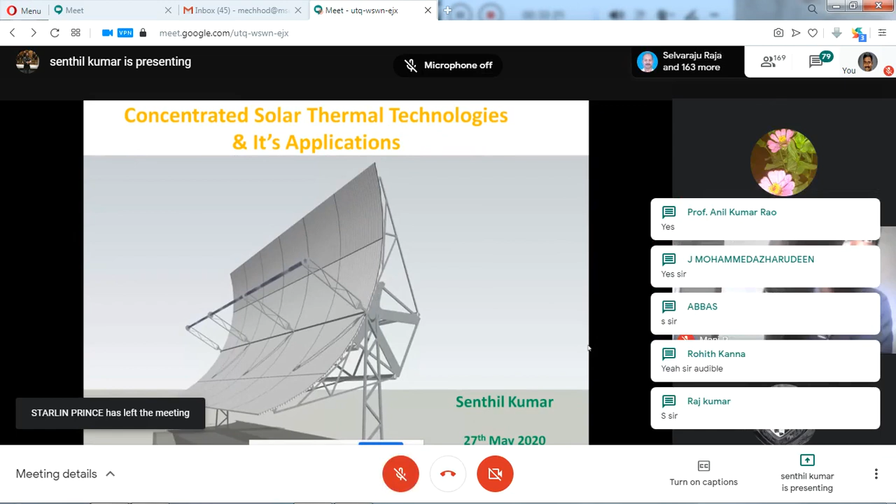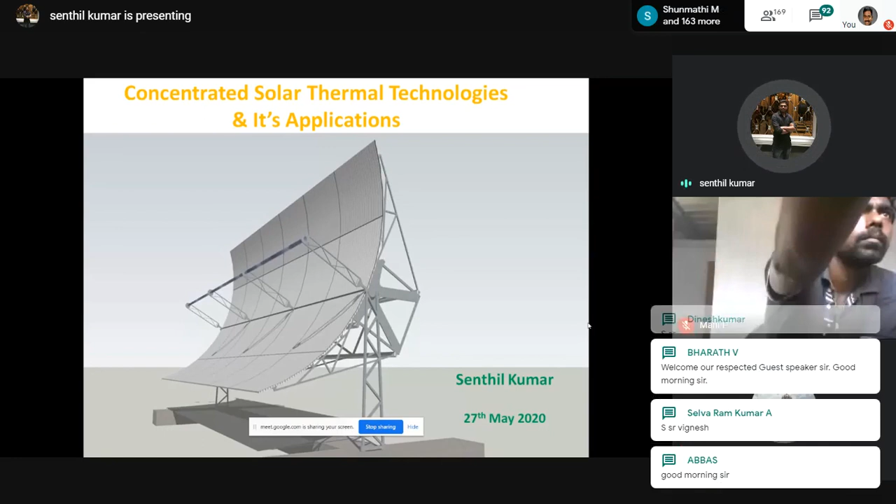So, very good morning, all. I'm Senthil Kumar. As Sir introduced, I am working in solar thermal field for the last 6 years, majorly into research and development and testing of solar thermal concentrators. Today I'm going to take a short class on concentrated solar thermal technologies and its applications. I have planned my presentation in this sequence.

First we will see what is solar thermal technology and why we need it. Then I will introduce you to the types of solar thermal technology, how it works, and what is the engineering behind it. Finally we will see the applications of solar thermal technology. Since it's a webinar, whatever doubts you have, please note them down, and at the end of the session we can discuss.

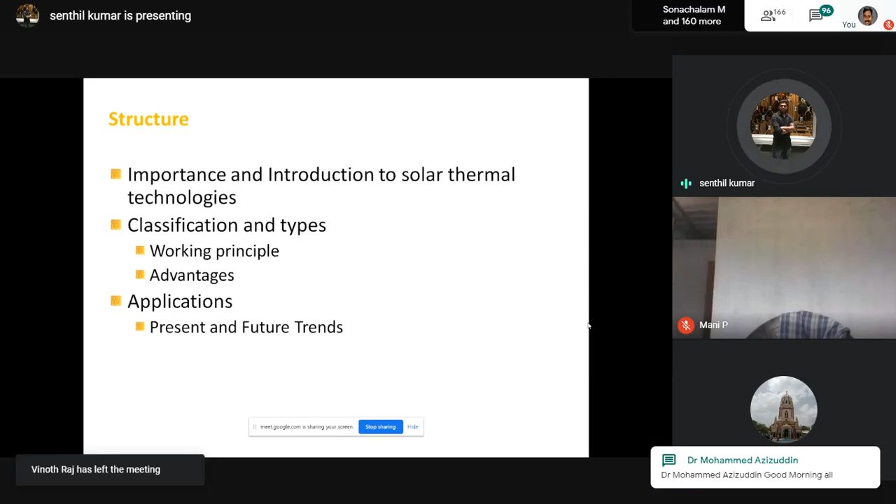This is very basic: we know that from the sun we receive two forms of energy, one is heat and another is light. Technically, we receive visible spectrum as well as infrared spectrum from the solar, and we call this solar power. So whenever we hear about solar power or a solar system, the first thing that comes to mind is solar photovoltaic technology. It's so familiar that everybody knows it, and basically that technology generates electricity from solar energy, which receives the light form.

So there is another set of technology, we call it solar thermal technology. This solar thermal technology harnesses the heat part, basically the infrared spectrum, and converts it into a useful form, that is hot water or hot fluid. We will be seeing in detail what are the available solar thermal technologies in upcoming slides.

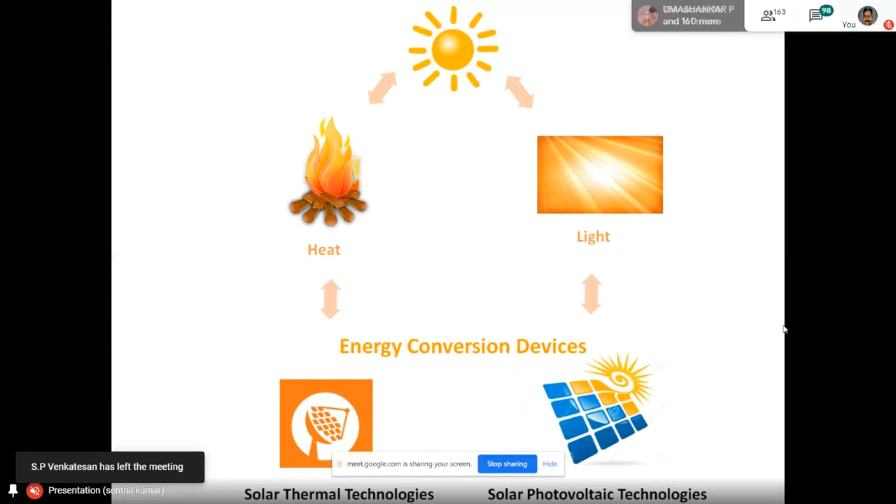But before proceeding further, why do we have to study this technology? Why is solar thermal technology available in the first place? Let's try to understand. There are two main reasons solar thermal technology has been created. The first thing is heat - there are different forms of energy we are using right now: heat, mechanical, electrical, and many others. But the fact is that the heat form of energy is majorly being used by us. In your household, we are not using much amount of heat compared to electricity - we pay electricity bills more than what we pay for heat.

But the fact is, even in our household, around 60 to 70% of our energy consumption is in the form of heat. You can analyze that - take the example of cooking, we need heat energy. Again, for air conditioning, either hot or cold, again it's a heat form of energy. Then for hot water, again we need heat form of energy. So in this way, around 60 to 70% of our final need is basically thermal comfort, not electricity. Electricity we are generating because of its high grade quality, and we can easily transfer it to some places without much losses.

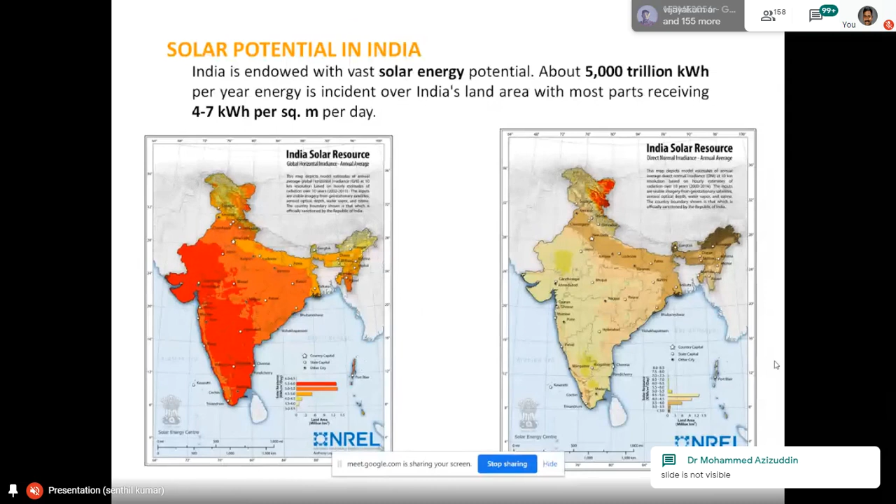Now, the classification of solar thermal technology. Solar thermal technologies are classified majorly into two types: the first is non-concentrating solar thermal technology, and the second is concentrating solar thermal technology.

Non-concentrating technology is also called solar water heaters. Most of us might have seen or used solar water heater systems, which come under the category of non-concentrating solar thermal technology. The basic working principle of this technology is the greenhouse effect. Hope you know how the greenhouse effect works, but let me give a very basic example.

Most of us might have experienced that when we park our car in sunlight, after some time the cabin temperature increases. The reason is the greenhouse effect created by our car windshield. The windshield allows short wavelength radiation from the sun to enter the cabin, but won't allow it back out, so due to that, the temperature inside the cabin increases with time.

The same concept has been adapted to generate more heat energy, which we call non-concentrating technology. We will see in detail how the system is actually built.

The second is concentrated solar technology. As the name suggests, in concentrating technology we concentrate a huge amount of solar radiation into a small point where the temperature goes very high. The very basic example is the lens and paper we played with in our childhood. All solar CST technologies have this principle of lens and paper, but with different geometries. People use different profiles and geometries to achieve this concentration, and we will see the technology in detail.

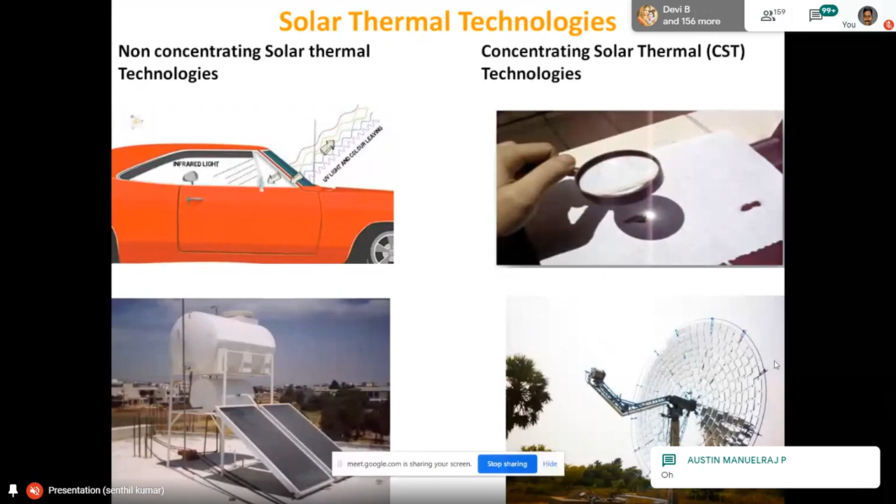There are 5 concentrating technologies available and 2 non-concentrating technologies available. The first is non-concentrating technologies, and there are 2 major types: one is the flat plate collector, and another is the evacuated tube collector.

Both of these are also commonly known as water heaters. Let me tell you how the solar water heater works, taking the example of the flat plate collector. Here we use a copper plate with a black coating, and above the copper plate we cover it with normal glass. When you expose this black copper plate to the sun, the temperature of this black body increases because of solar energy, and the glass further creates a greenhouse effect. Due to that, the temperature inside the chamber rises as high as 100 degrees Celsius.

So when you flow water or air above this copper plate, the water or air gets heated up, and that is collected in a separate storage tank. This is how the basic flat plate collector works.

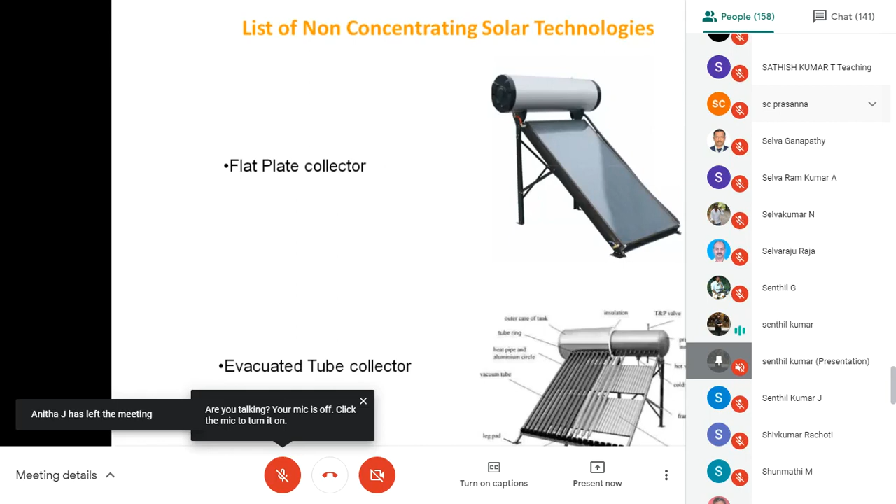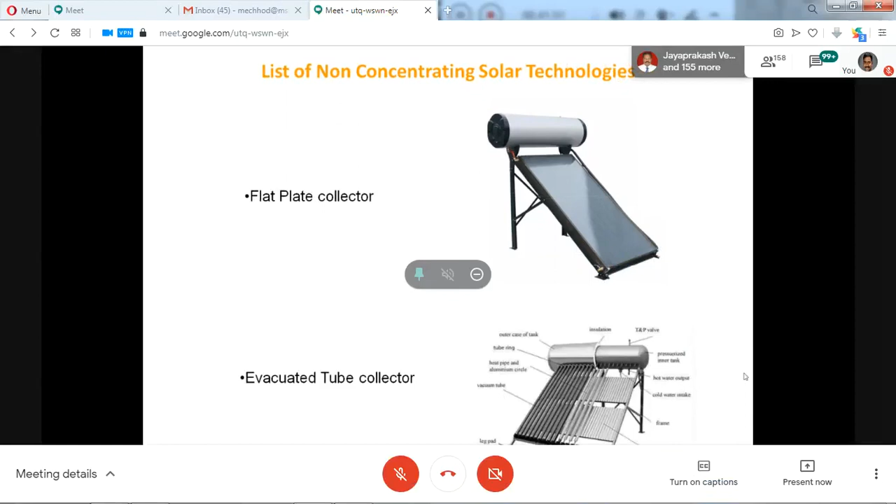In the same way, another technology is called the evacuated tube collector. Here, instead of using a flat surface, we use small individual tubes made up of glass, which are evacuated - completely vacuum - so that the losses are reduced. Both these non-concentrating technologies are able to deliver a temperature range of 60 to 120 degrees Celsius.

So you can ask where these are being used. These water heaters are generally used in households as well as in industries. In our homes, we can use this solar water heater in place of electrical geysers. Electrical geysers are one of the energy-consuming devices in our home, and they can easily be replaced with this solar water heater.

The advantage of solar is it's very cheap. You can see the cheaper cost, and the lifetime of these heaters is around 20 years. So for 20 years, any electrical heater requirement can be completely met with the help of this technology.

Okay, 120 degrees is fine for the domestic range. When we talk about industries, industry needs higher temperature. In some industries, they need 400 to 900 degrees Celsius, and in some cases, they need 1000 plus degrees in the metal industry.

So for meeting this requirement, we use concentrating solar technology. In my presentation, I will be using the abbreviation CST for concentrated solar thermal technology. In concentrating solar energy, you concentrate huge radiation into a focus. There are 5 different technologies presently available under this category, and I will tell you why each technology was developed.

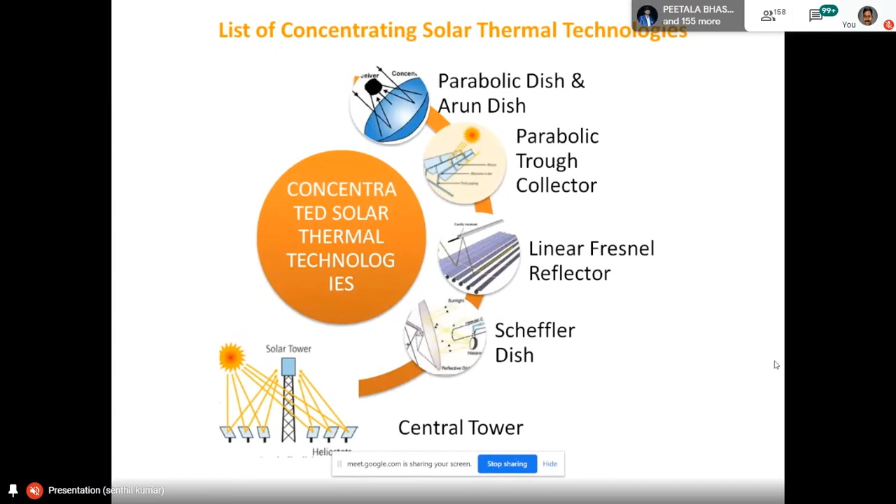So let's start. The first kind is a paraboloid disc concentrator, which is a three-dimensional parabola. We know that a parabola has a focus. So mathematically we draw a parabola and we know the focus. What we do is make a parabolic shape using a mirror.

In the picture you can see the entire parabolic mirror, and when you track this mirror normally, what happens is when sun radiation falls on the parabola, it reflects to the focus. This image will help you understand: whatever falls on the surface of the mirror is diverted to the receiver, and in the receiver part the temperature is high.

So this high temperature at the receiver can be used to supply either water or oil. The oil gets heated up, and that hot oil is used for industrial applications. This technology is able to deliver 850 Celsius, which is a very high temperature that meets many requirements. This is one of the solar thermal technologies.

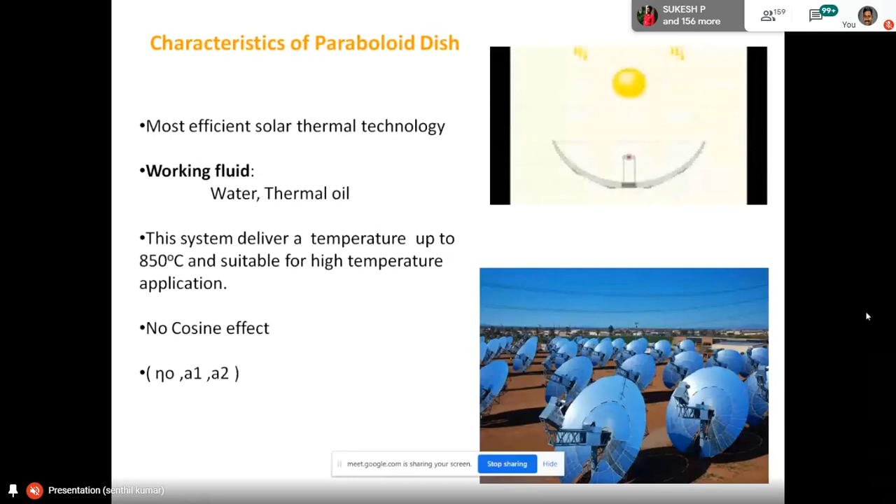So people started developing another technology to solve the land issue. The second technology they developed is called the parabolic trough collector. This is a modified version of the paraboloid disc. In the paraboloid disc, we used a three-dimensional parabola, just like a dish. Now here they use the shape of a trough, completely made in the shape of a parabola. The concentrator is made of solar reflectors, the receiver is made of a solar absorber, and the concentrator is placed in the north-south direction.

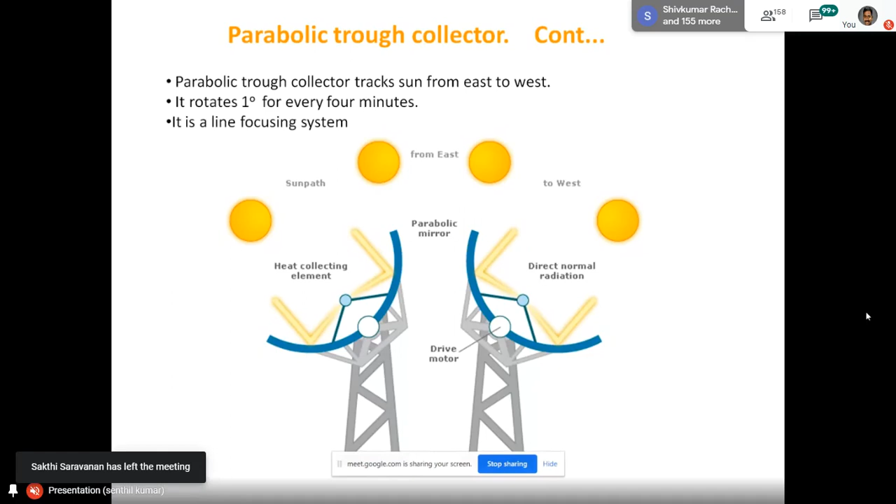It works like this: this image will help you understand how it works. In the morning, the concentrator faces east, and it tracks slowly according to the sun's angle, so by evening it faces the opposite side. This is how the solar concentrator works.

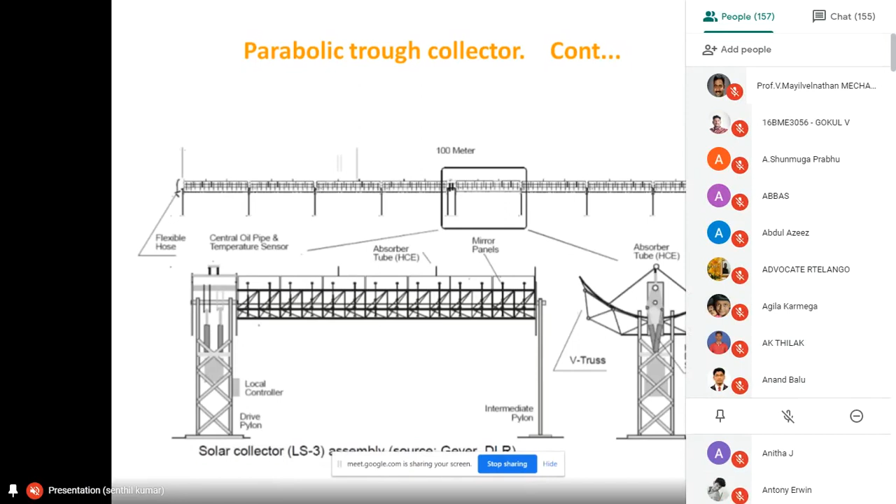This is the advanced concentrator over the parabola. Here you can install n number of modules in series together with one another. These technologies are able to give us 400 degrees Celsius.

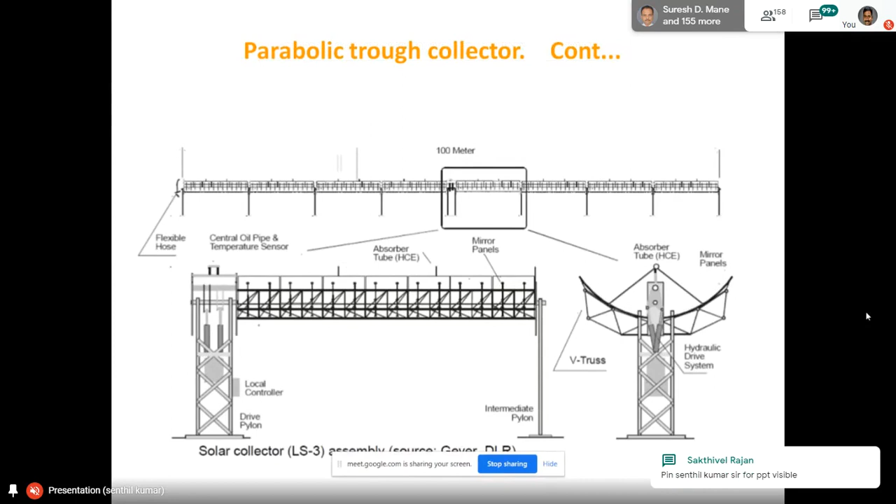So you can see here, there are different parabolic concentrators that come with modules, and you can connect n number of modules in a series. I will show you one such system in our institute. Here, compared to the earlier setup, you can see we use much less land than the paraboloid disk, which is the advantage of the parabolic trough collector over the first technology.

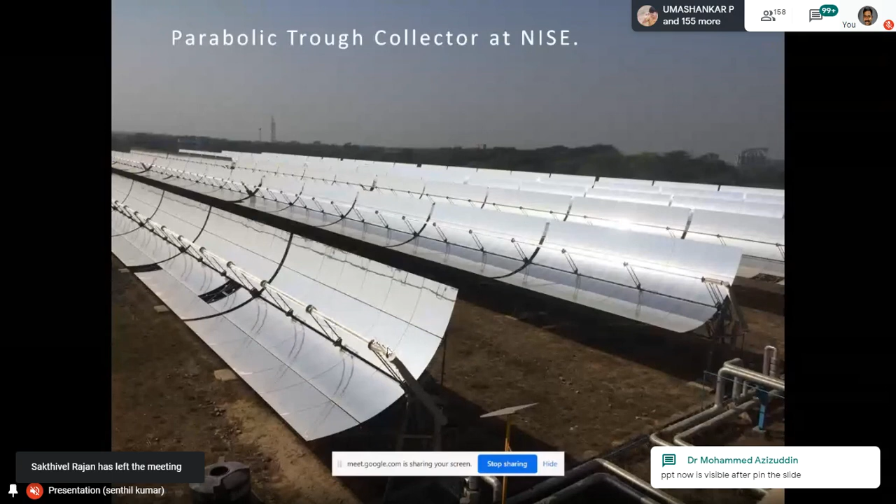You can see the first trough there, right? The shiny part is where sunlight falls on these mirrors, which track and reflect to the black part you see in the middle, the receiver tube. Inside this receiver tube, fluid flows from one end of the collector to the other, and during this flow the temperature of the fluid rises gradually, going as high as 400 degrees. People use this hot water or hot oil for different purposes, like for industrial processes or power generation.

We will see all of these. So the third technology is a linear Fresnel reflector.

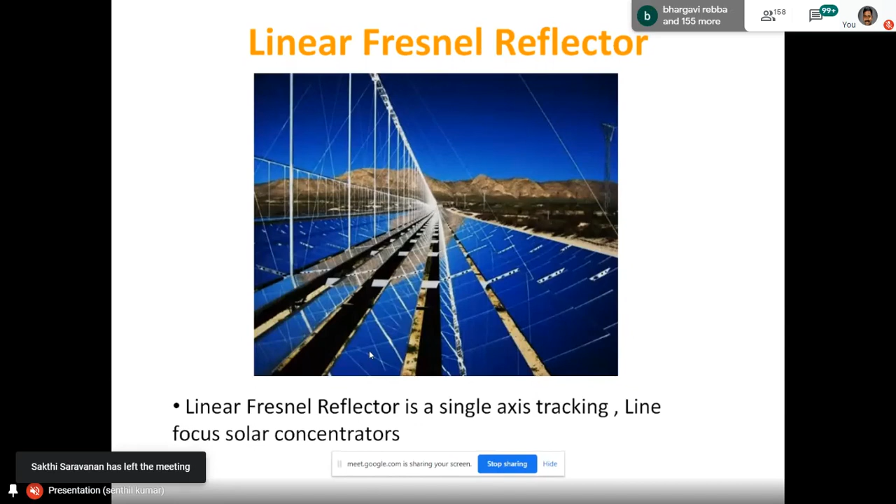Parabolic trough concentrator had its purpose, but there were still improvements to be made. Let me tell you the drawbacks of the parabolic trough concentrator. This parabolic trough has a curved mirror, and they are quite big in size, and the manufacturing of a curved mirror is very costly.

So there is a restriction to constructing a big solar concentrator. So what people have done is adopt the concept of Fresnel, a French scientist.

Hello. Is it audible? Just yeah. Yes, is it okay now? Okay, okay, just give me a moment. Is it? Yeah, yes. Sorry.

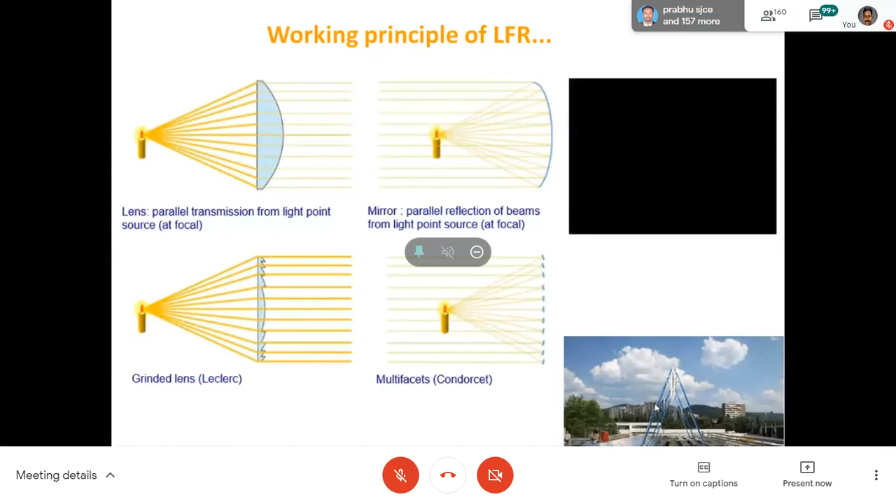So this LFR started adapting the concept of Fresnel, a French scientist. We know concave and convex lenses, right? Convex lenses basically have a curved profile, and manufacturing that curved profile is very costly compared to manufacturing a normal glass or mirror.

What Fresnel did was make small cuts at different angles. In the second image you can see the first image is actually a mirror, and the second image is basically a cut section of a concave mirror, where he changed the angles of these cut pieces. Now both do the same thing, but here we don't have to generate a huge curved profile which is costly. This helped us develop a low cost technology.

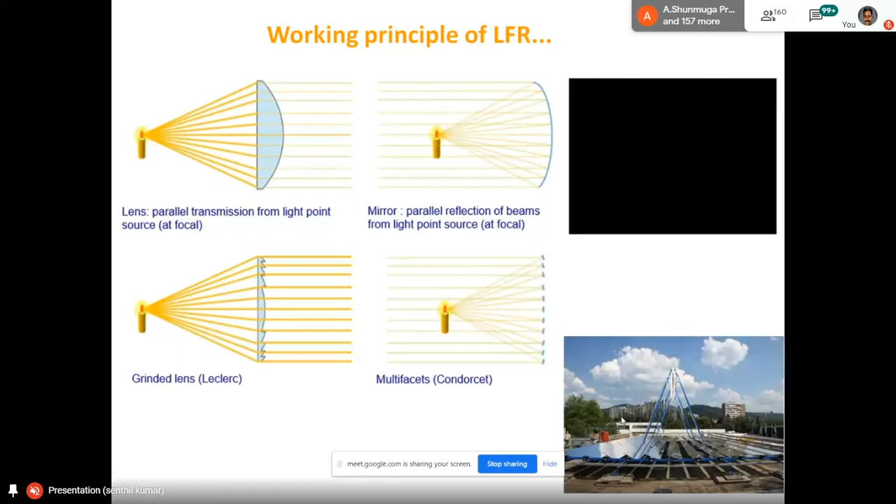So we started adapting this Fresnel parabola technology, called linear Fresnel. I will show a video of that.

Sir, video is visible. Yes, sir, visual, sir, yes. Okay.

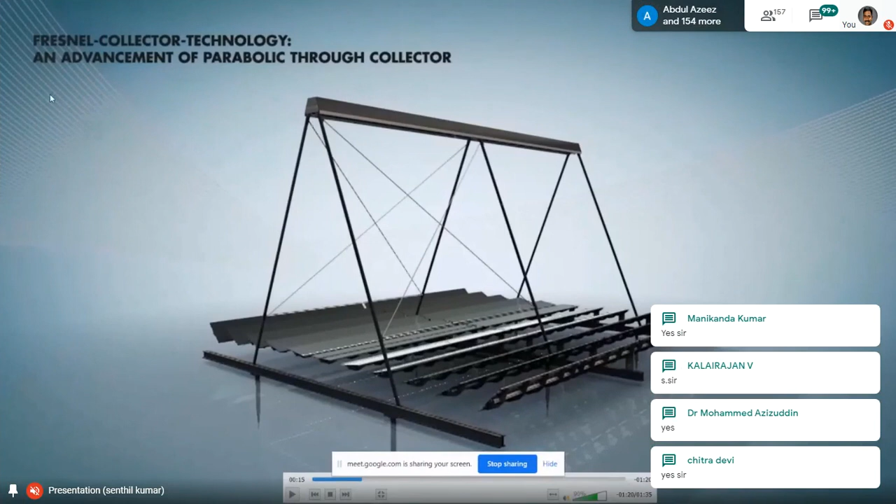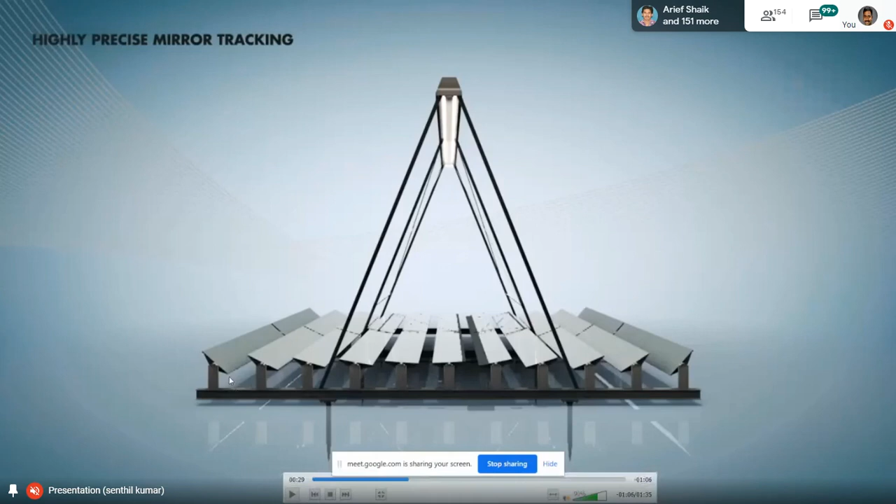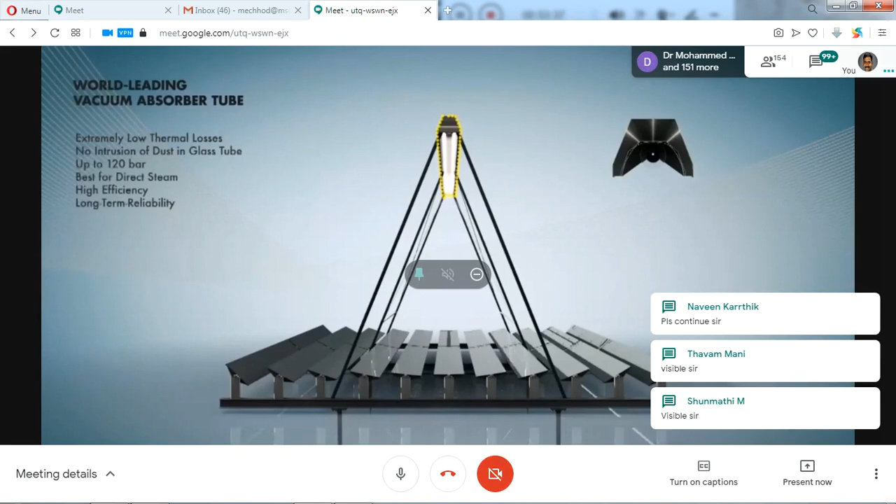Hello, sir. Hello. Sir, your PPT is not visible. Sorry for that. Actually, is it showing? No sir, not visible. Okay, let me try again. Can you see? Can you see it now? Another one, is it okay? Pin visible, sir, yes, pin your sir. You can, fine, continue sir. Sir. Yes.

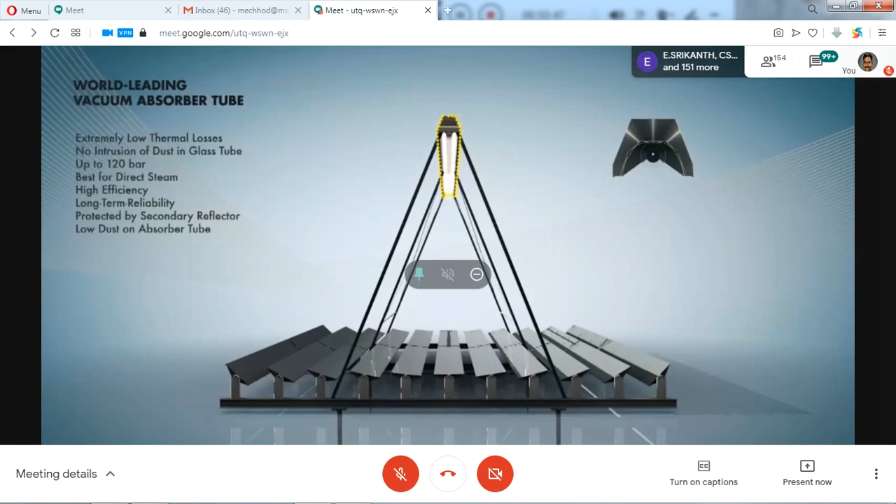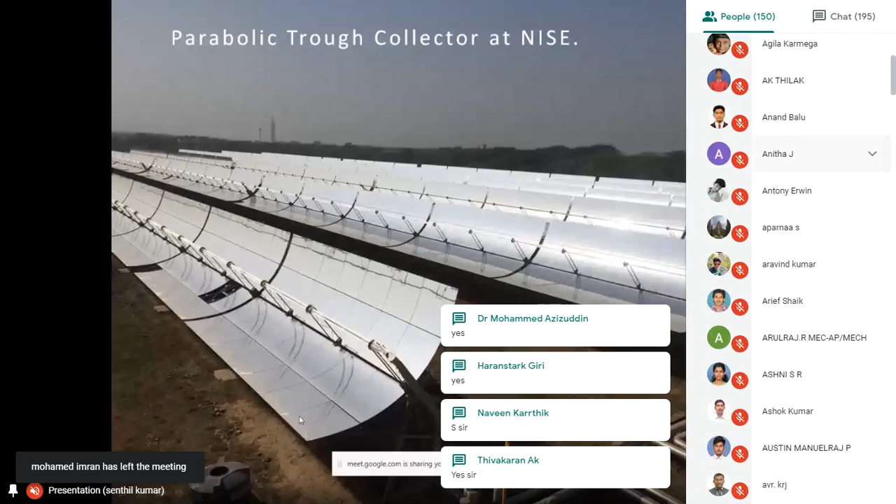Yes sir, carry on. So you can see the concentrator. So what will happen when wind flow happens? This entire structure will shake, and due to that we lose a huge amount of the receiver radiation.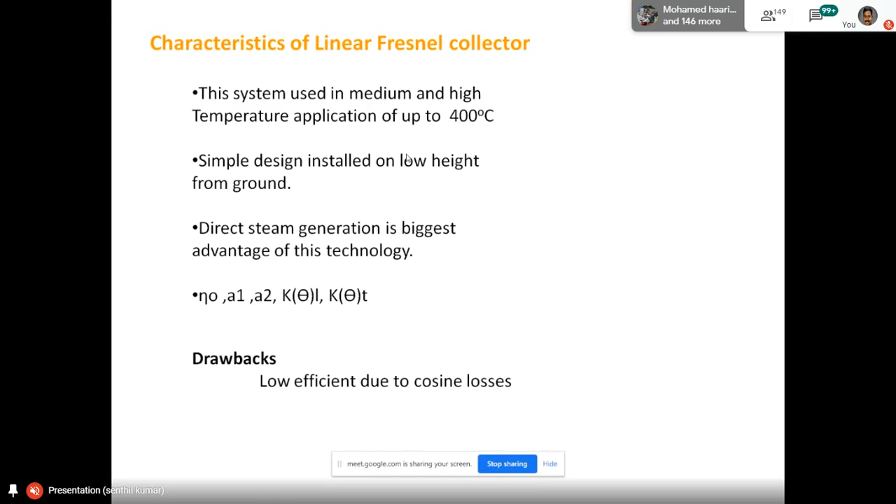Fourth technology: again a German scientist who developed a simple version of the paraboloid dish concentrator, the first technology we discussed. In the paraboloid dish concentrator, the collector and the receiver both move. That is used very much in industries.

But Scheffler thought about getting the result so it could be used for applications like for village people, so they can use solar. So Scheffler developed this modification, and this helps bring the technology to people, and it's being used even in India for cooking applications.

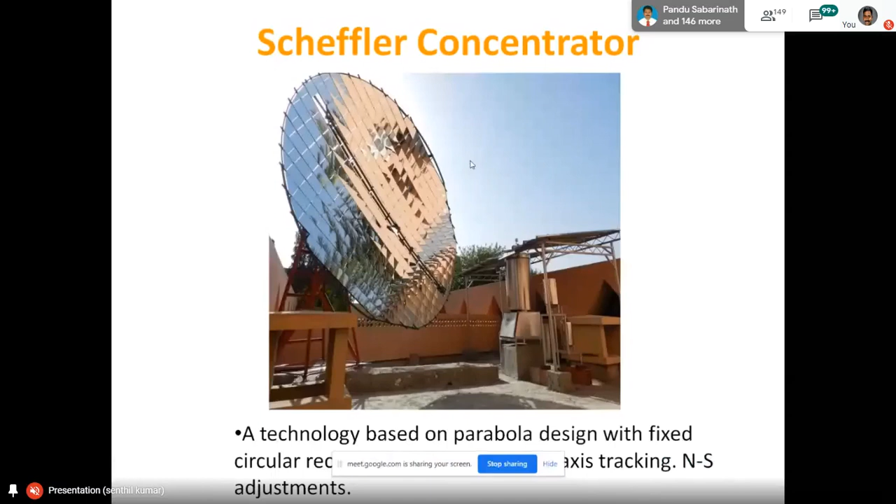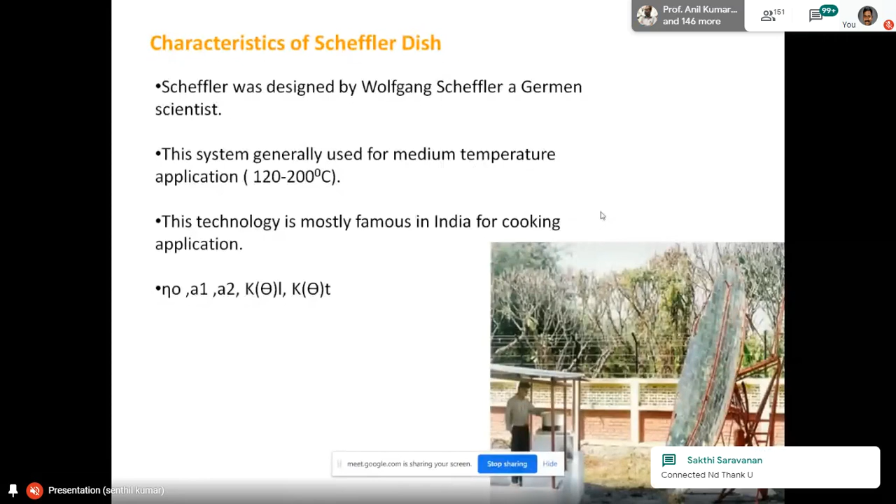In the picture you can see the concentrator is kept outside, and there is a shade where people are cooking. So the technology was about bringing sun indoors. It helped in different ways, so we can bring this sort of concentrated solar energy into homes also.

In the Scheffler dish, the concentrator is on top and the receiver is at the bottom. This is possible for a small system, but for very high temperature needs, there's a huge amount of reflector area required compared to the Scheffler dish.

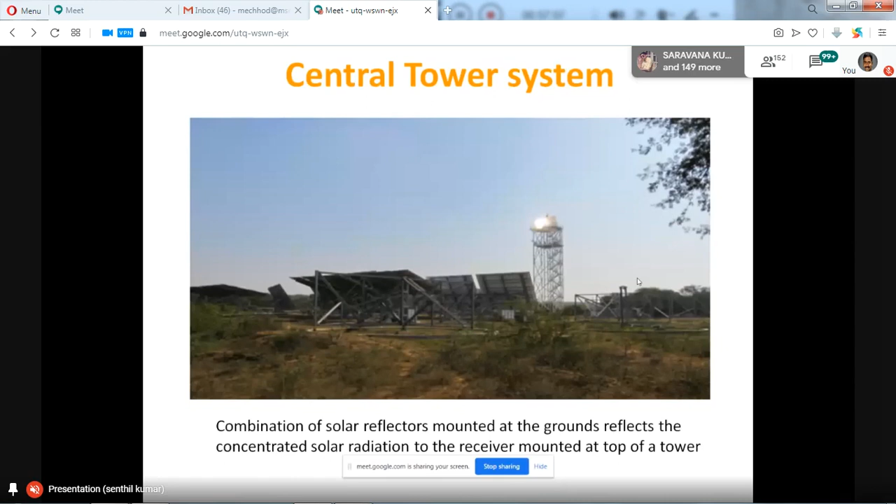So they came up with this technology, called central tower. In this picture you see a huge number of solar mirrors, and these mirrors have a tracking mechanism to track the sun at any point, directing it onto the shiny receiver part. All the solar radiation is received there, and it can reach up to 2000 degrees Celsius.

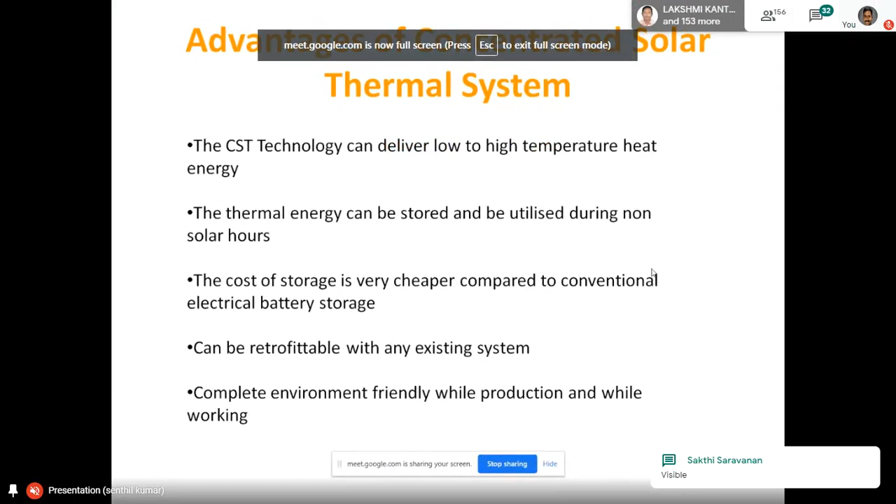Yes sir, so I'm continuing, sir. So sir, as I said, right now the very familiar energy storage system is... yes sir, I'm continuing, sir.

The most familiar energy storage device we know is chemical batteries. Chemical batteries have drawbacks. The problem with batteries is, first of all, their lifetime is very low.

Batteries typically last 5 to 6 years - even in our vehicles, we have to change them periodically. Second, the cost of batteries is very high. And they're not environmental friendly. That is the reason people are not using battery systems on a very large scale, especially in solar power - we don't commonly see electrical batteries there.

But in case of thermal storage, the energy can be stored efficiently for a long term. Because in thermal storage, we are also doing it in our own life, like with a flask - you pour hot coffee in it, and the temperature remains in the container for a long time. So the same principle can be adapted here.

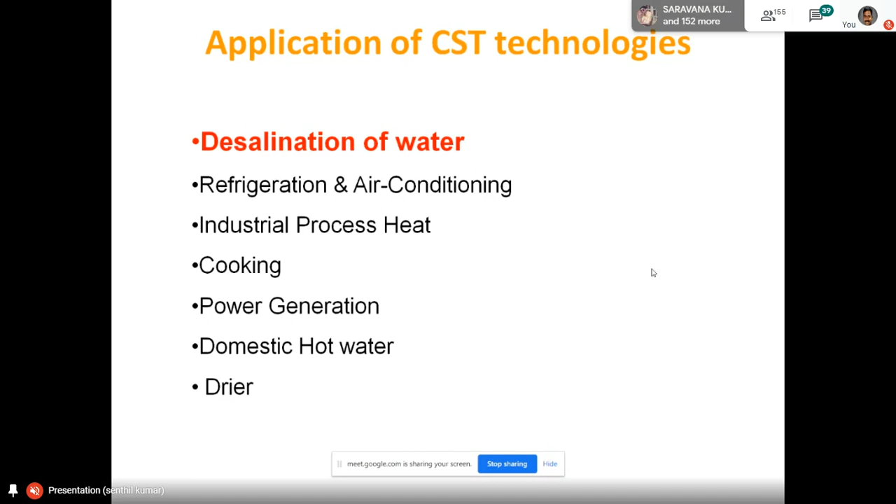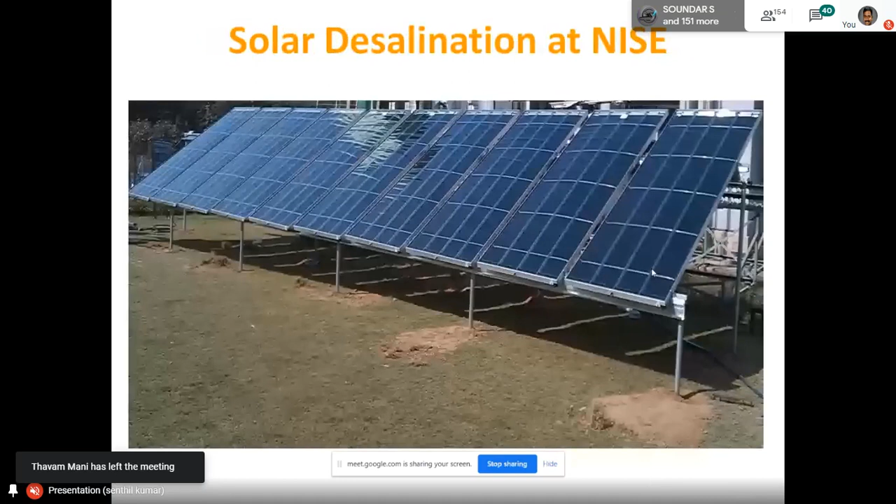You can also convert seawater into drinking water - a very simple example of a desalination system is the single effect flatbed system. This system has a middle layer where generally we pour water, and a cloth, with the sun heating the water in the bucket, causing it to evaporate.

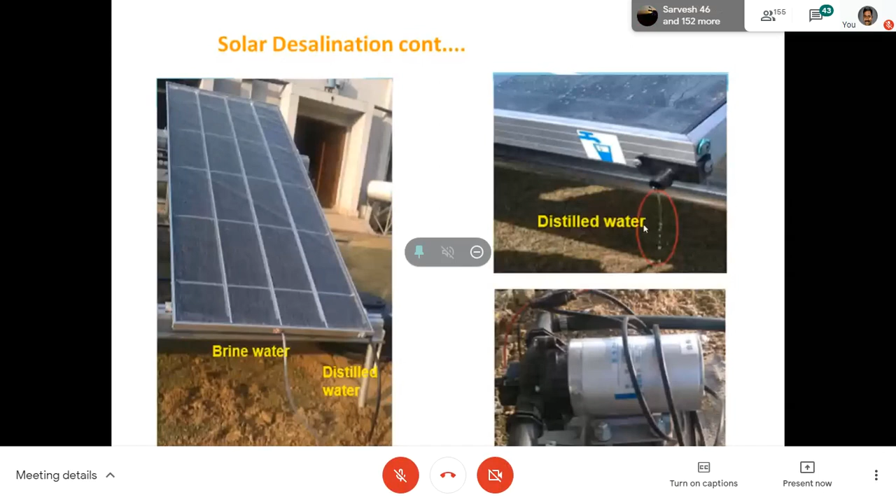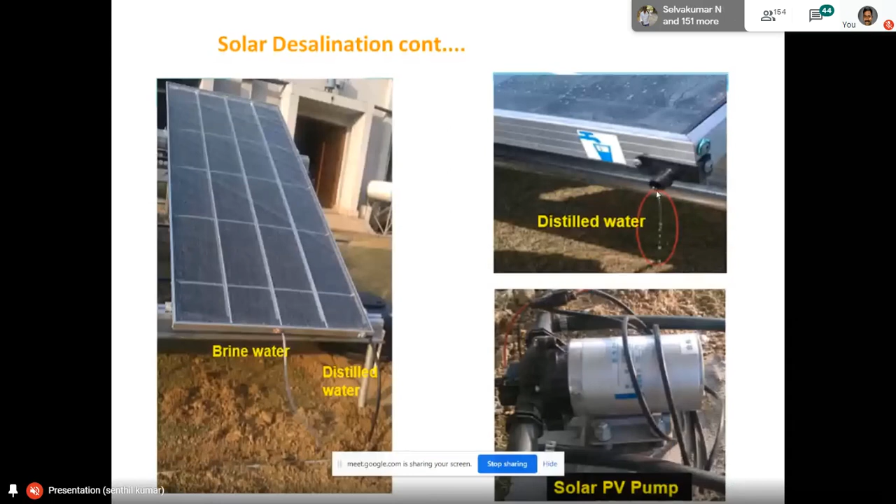The vapor rises to the transparent film, where it condenses, and using this method you can get around 5 to 30 liters of pure water, with the TDS level close to 0 ppm - converting seawater into usable water.

In Ramanathapuram, I think, they use this method, letting the seawater in for desalination purposes.

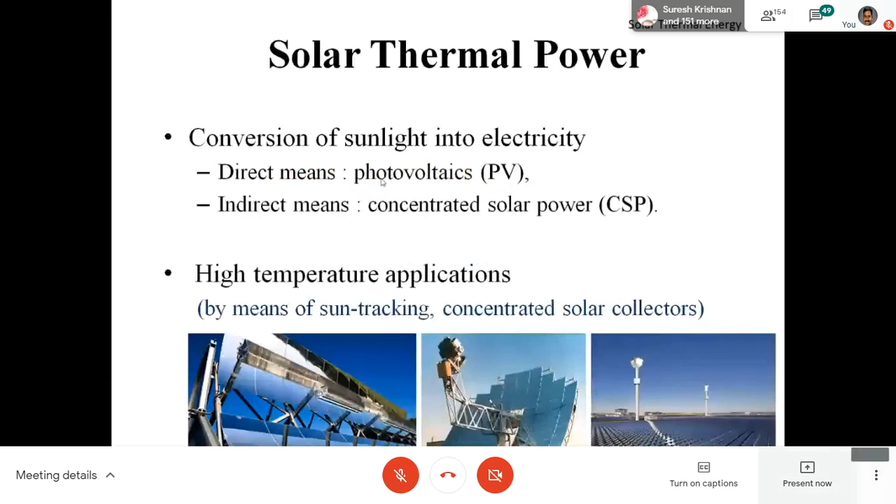So the second very famous application of this CST technology is called CSP projects - Concentrated Solar Power. Unlike the photovoltaic panel effect, which is direct, here what we do is convert solar radiation into heat, which is then used to generate electricity.

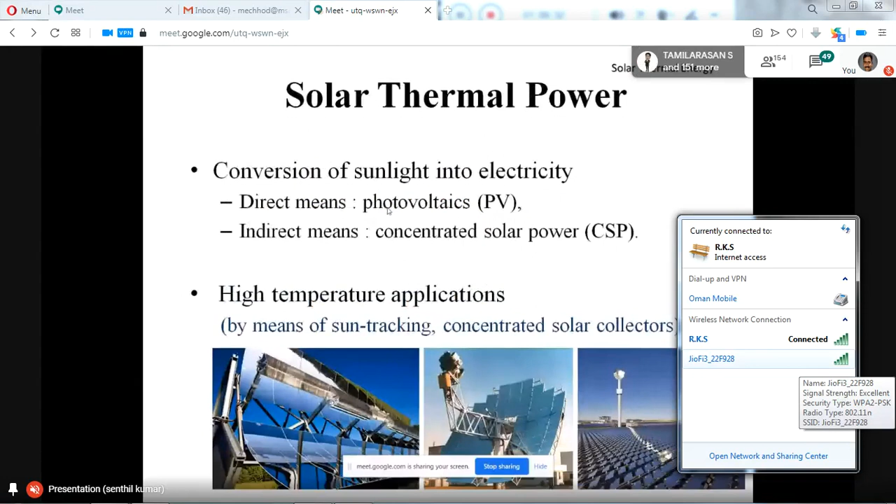And I have one video - let me start this from the beginning. One second.

So hope you were able to see the video. Basically, a solar thermal power plant works on the same principle as a conventional power plant, but only the boiler section is replaced with solar thermal concentrators. This solar thermal concentrator yields energy from the sun and stores it in a storage tank.

Sir, your audio is breaking. Just a minute. Is it clear now? Clear, sir. Is it right? Okay, clear, sir. Thank you, sir.

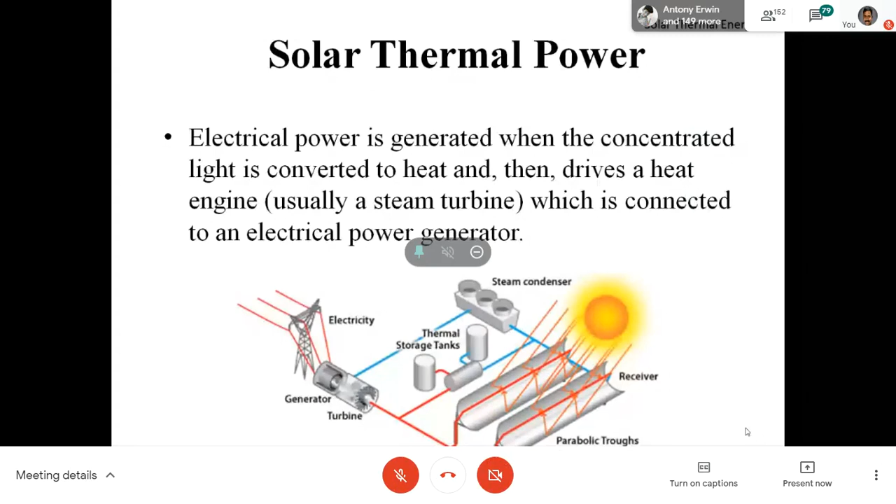This solar thermal power plant, as I said, is similar to the conventional thermal power plant. The only difference is that in a conventional power plant we use fossil fuels like coal or gas. We replace that fossil fuel burned boiler with solar thermal technologies, because these deliver heat, and that heat is used to generate power.

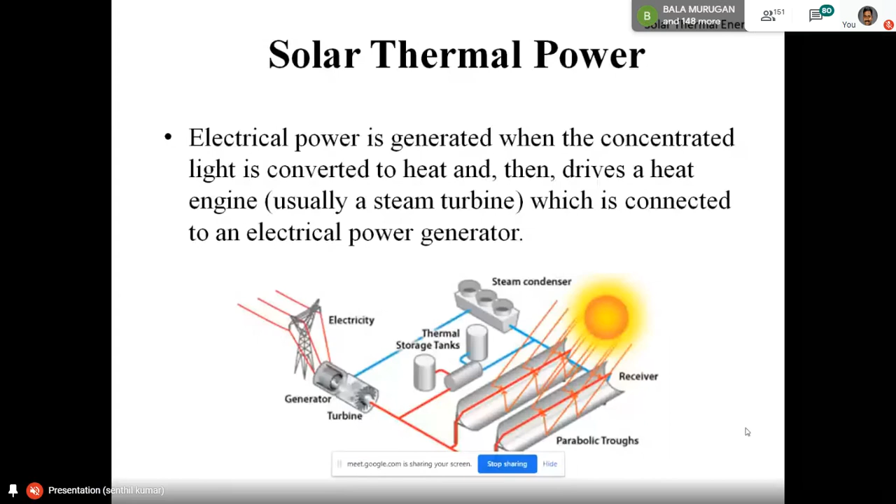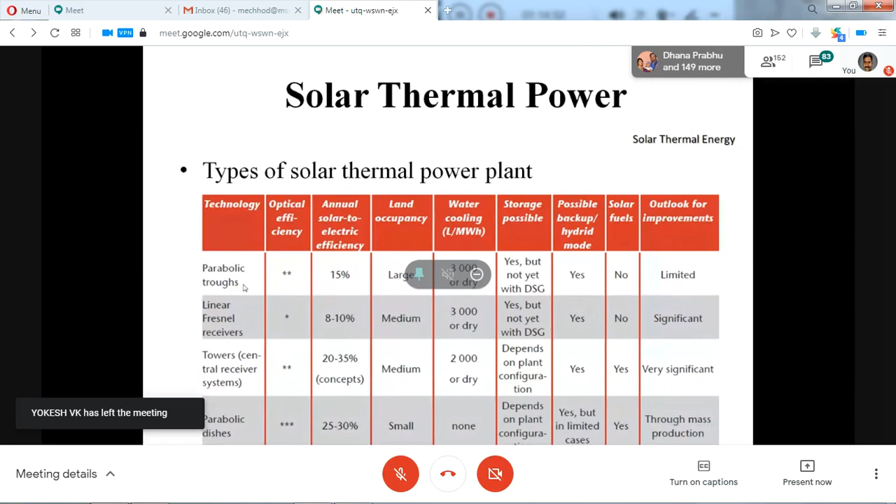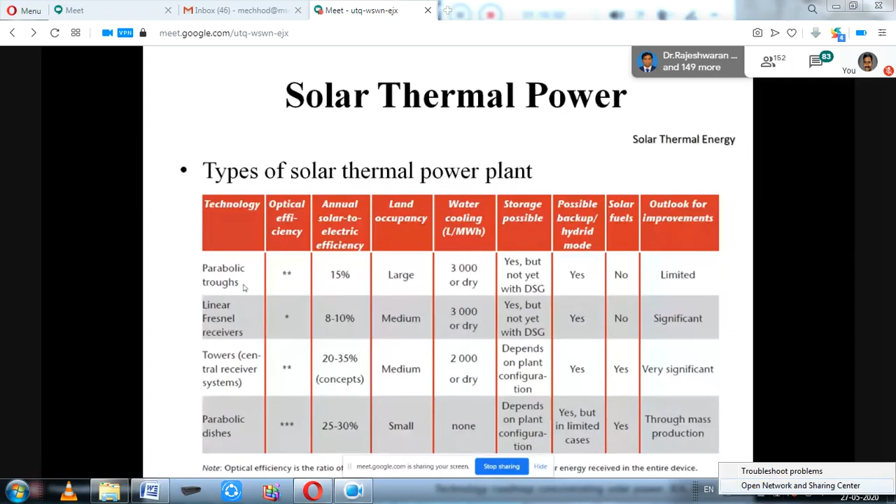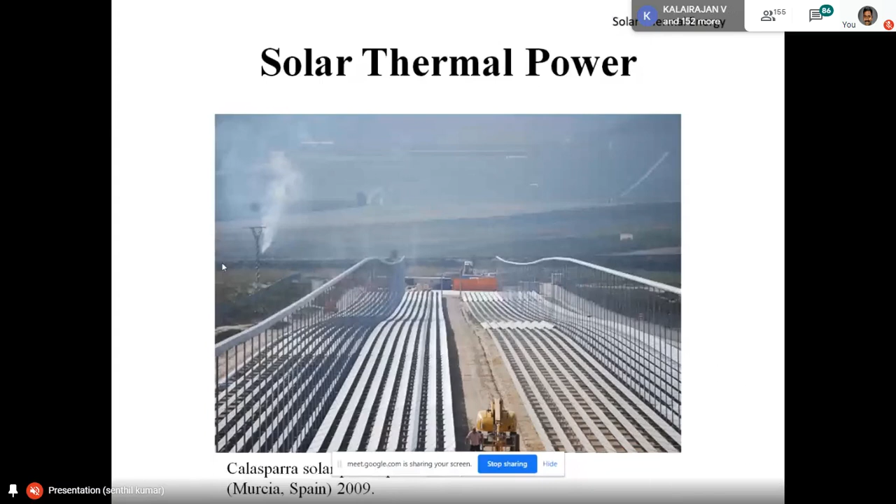The third application is cooking. Especially India is one of the leaders of CST technologies for cooking, and around 50,000 square meters has been installed so far worldwide. There are two types of cooking: direct cooking and indirect cooking.

For example, in direct cooking the cooker generates heat locally where you can directly keep vessels for cooking. In indirect cooking, you generate steam with the help of the concentrator, just like our power plant, and that steam is taken into the kitchen for cooking.

Even in Tamil Nadu, there are many installations for cooking. The very famous one is in the Rana Mission in Chennai. If possible, you can plan to visit there and share. They also store energy in steam accumulators in the morning and use it for cooking dinner at nighttime with the stored energy.

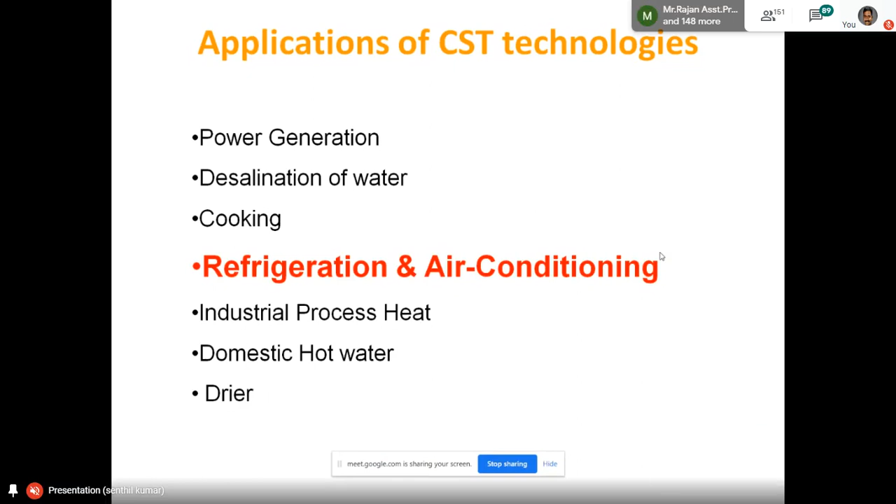The fourth application is refrigeration and air conditioning. You may ask how this technology, which gives heat energy, can generate a cooling effect. There is an absorption machine that does this. Basically, heat energy is given as input, and this system undergoes a sequence of processes which generates cool energy in its evaporator. I'm not entering into detail on this vapor absorption process.

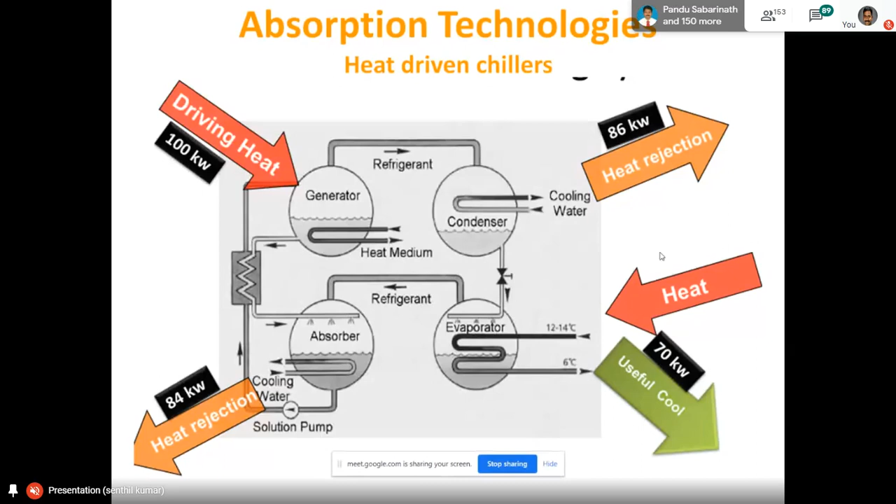You can connect with me on my email ID if you wanted to know more about this technology. Because of time constraint, I'm just skipping it for right now. In kilowatts, or in tonnage, we can say it's around 20 tons of refrigeration.

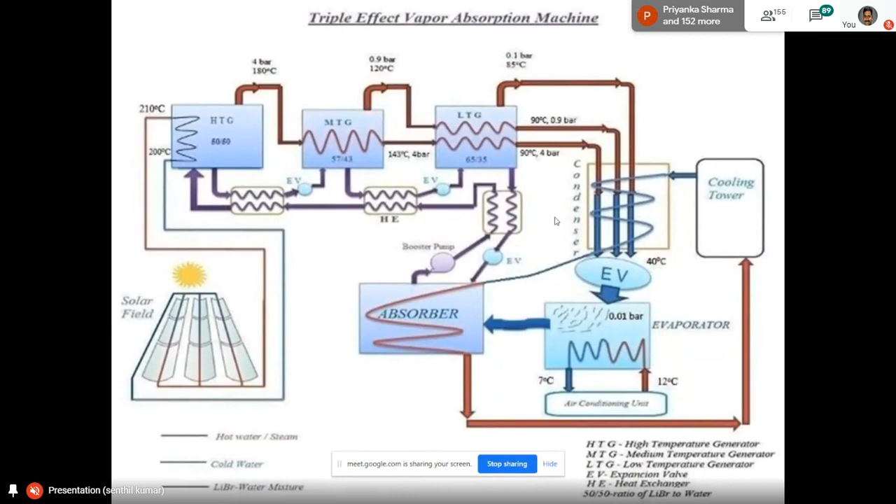The first thing is this system generates cool energy that is supplied to the office building, but the sun's energy is not consistent. On cloudy days, the solar energy fluctuates a lot. If we don't have a hot storage tank, it will directly affect our comfort, with cooling turning on and off intermittently.

To avoid that, I have installed the hot storage system. This hot system stores excess energy, and whenever there is a fluctuation on the solar side, it delivers cool energy for our comfort. Second, the cold side storage helps us in the morning and evening time.

What happens is the office starts around 9 a.m. in the morning, but sometimes the system takes time up to 10 or 10:30 to reach its capacity. During that time, it stores excess energy for the day, and in the morning when you turn on the system, it's able to deliver instantly, so you don't have to wait for the system to build up.

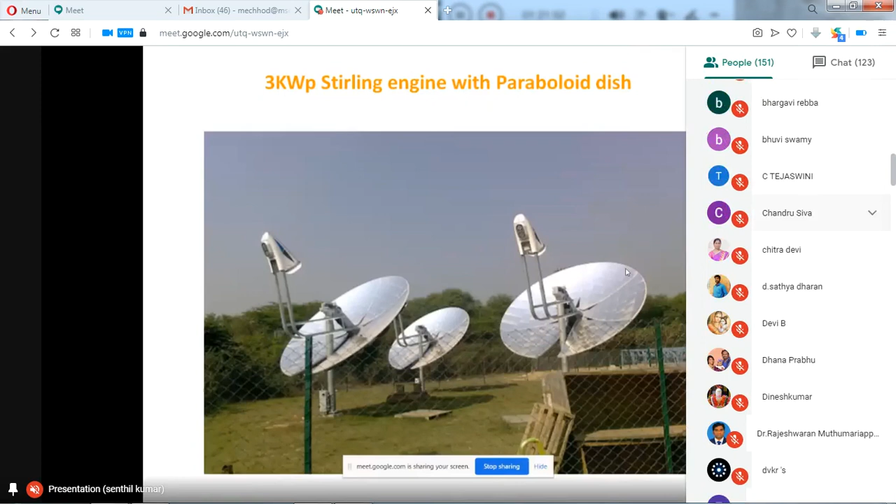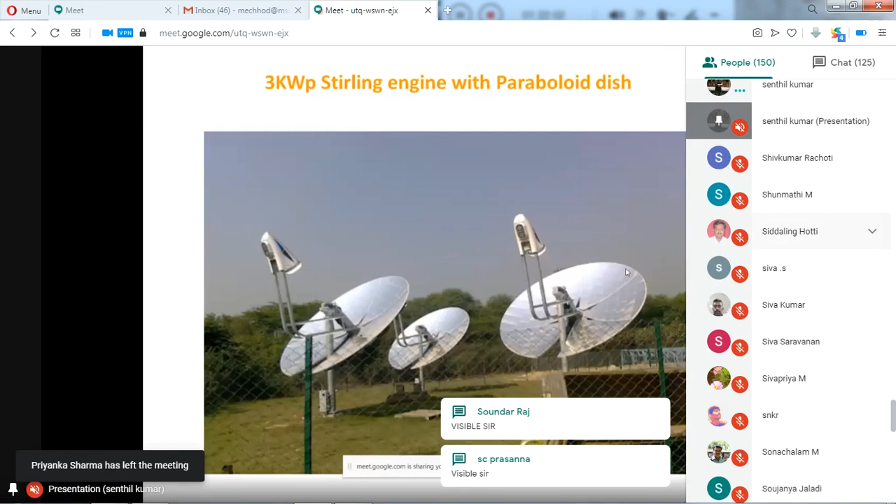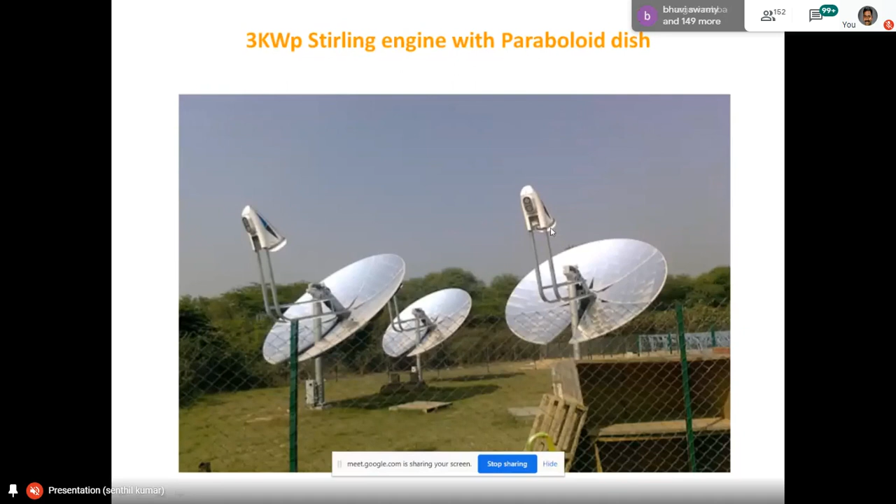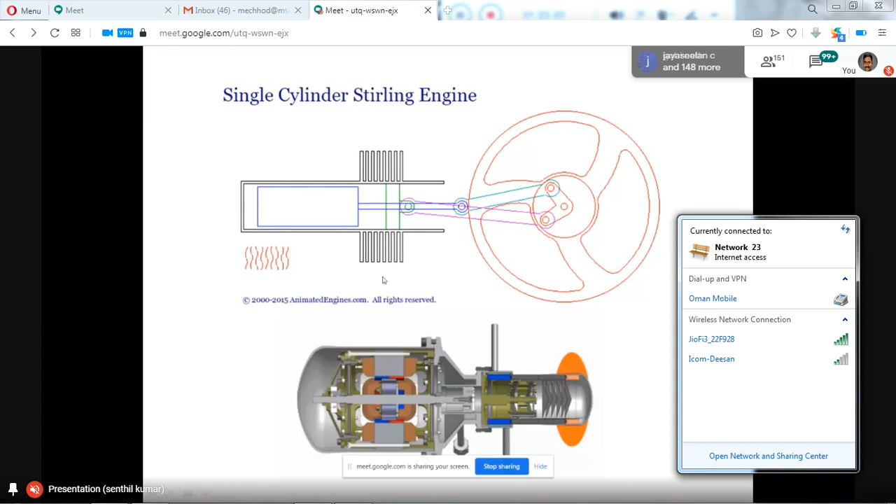Stirling engine basically uses helium gas. So what happens here is this directly converts into energy, done through the receiver. They connect this, so what happens is the sun's temperature goes very high, and the Stirling engine will start to receive it. The piston goes up and starts to move from this piston chamber, generating electricity with solar energy.

So far we have seen the importance of solar thermal technology, the types of available solar thermal technologies, and where this technology has been applied in practical life. So we have seen the applications of it. I've completed my slides, so if you have any questions, you can ask me.

You can ask me now. So you asked about molten salt. Actually, I haven't covered the thermal storage part, so let me explain. Molten salt is basically

used as a heat transfer fluid, and also for storage. Please mute, I will explain. This molten salt is basically a heat transfer fluid, and the same salt is being used for storing the energy. So what happens, sir?

We know that in the receiver, the temperature will go very high, especially in the case of a central tower, where the temperature at the top of the receiver will be very high. So we need some fluid to take that energy from the top to the bottom, and there we use molten salt. We cannot use water in that particular system because the temperature will be more than 700-800 degrees Celsius, so if we use water, the pressure would go very high, more than 200 plus bar, and it wouldn't be easy to maintain water at that temperature.